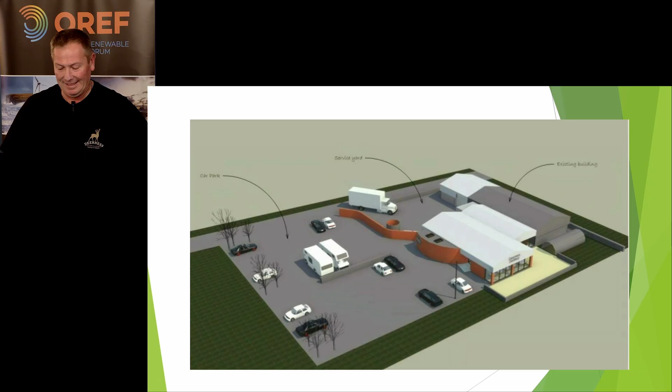In terms of our CHP plant here at Deerness Distillery, we're looking at a 40 kilowatt per hour system, which also produces hot water at the back end. But we're looking for something for base load. With wind, solar and various other things being very cyclic, it's not going to give us the base load that we need. Whereas a biogas plant, we can run with the gas train and everything else to give us base load power.

Some of the places where we need the hot water are our mashing process and our CIP cleaning. We're also looking at piping our polytunnel floors - taking up the floor, piping hot water underneath the polytunnel, heating the ground up and extending our growing season. We can do the same thing outside as well.

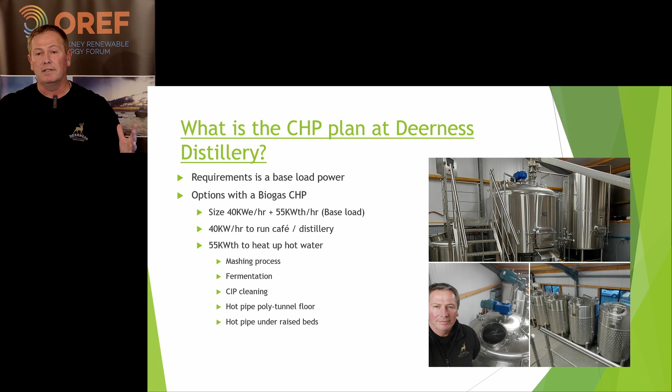You've got the ability with this - during the evening when we're no longer working in here, the biogas plant is still producing biogas, so we can have a small containment for biogas which we can then run through into our stills. Our stills next door, which you can have a look at afterwards, are gas heated, so we're currently on LPG for those.

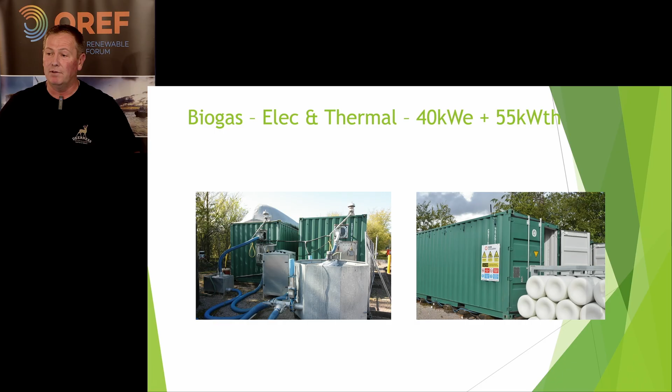We went for gas stills, direct fired. The reason we went for gas stills is that electric stills are very, very costly. We did the cost estimate for electrical stills, and it'd be in the order of about £150,000 a year to run those, versus about £35,000 in LPG gas bottles. But with a view that we could eventually substitute that with a bit of biogas in there as well, running off our own methane, which has been scrubbed prior to.

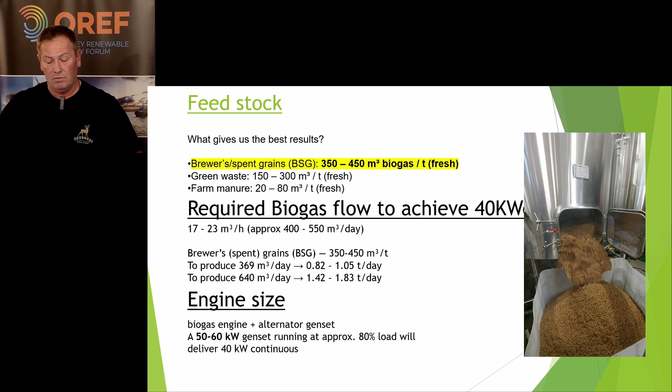In terms of what we actually need to put in there, our brewers' grains are 1.4 to 1.8 tonnes per day fed into the front end of the machine. Our loads going into our grains are probably just about a ton a day, so we've got enough yield to put into that.

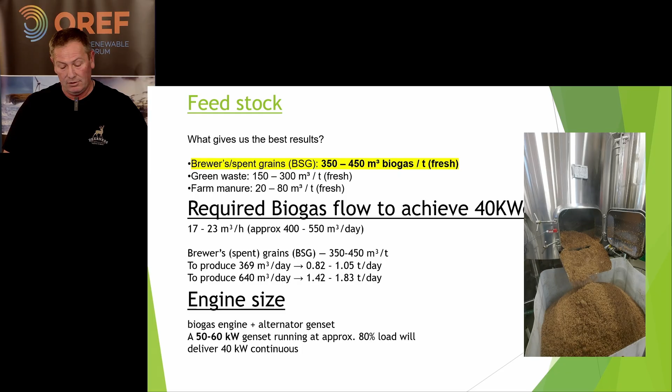In terms of engine sizing that we've been looking at, so 50 kilowatt gen sets, 80% load, which gives a 40 kilowatt continuous. It's a bit annoying, that beeping noise, isn't it? But it's there for a reason, that one.

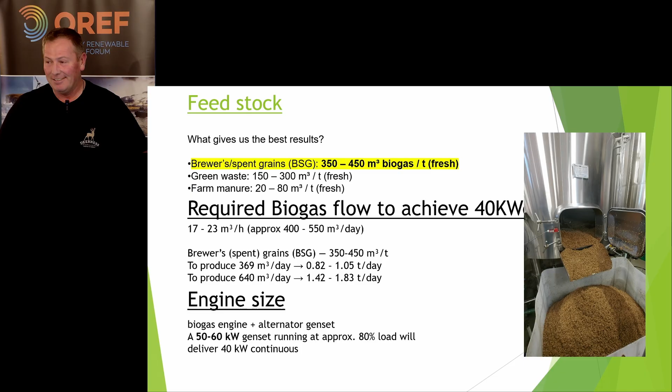James knows all about this, wouldn't you? Can you hear me all right on the speaker there, Mike? Is it okay? Is this all going okay? I'm just going to try and give you a bit of PA here. Just keep talking.

So obviously we're producing heat from our biogas plant, and we're also going to be recovering some of that from the engine jackets, so we can recover some water off there, which would be great for our process fluids.

We've got a hot liquor tank next door, a 36 kilowatt load, but if we can use some of that engine heat to put back into that tank, we're only heating up a small bit or keeping it stable rather than heating from ambient water temperature, which gets much colder in winter, 10 degrees, right up to the 75 degrees we need on our first waters. If we've got hot water coming off a jacket already at that temperature, all we're doing is maintaining it rather than putting in a massive load, so we're really trying to reduce our energy usage.

We've also got exhaust heat, we're looking at that at the moment. That brings a bit more complications - you've got gas to water exchanges, then you've also got flue gases in there as well, so you can have corrosion issues down the track.

As I said, spare methane, which we could potentially use in our copper stills. So we're mucking around with some of the feedstock at the moment to get an analysis on a sort of test bed size, doing a pilot plant, seeing how much biogas we can pull off, and what sort of crystalline structures we get out of that as well.

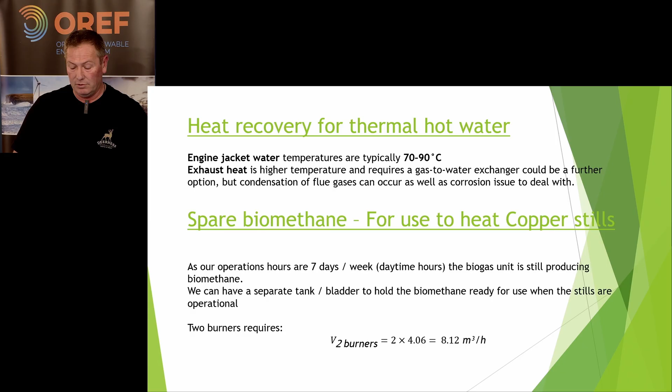Pros and cons, lots of these. Reliable off-grid electricity - if we have 40 kilowatts running at a base load, there's also a potential when we're not using that to put that back into the grid. Obviously that's a bone of contention now, as most of you probably know in the area here. There's potential to use battery backups as well.

The flexibility that gives us is, and obviously it's our waste effectively, so we can still put some of our base load to farmers. At the moment, all of our grain goes out to local farmers here for their beef cattle, but with this system it would probably be like an 80% usage of our own grain in the biogas, 20% would still go off to the farmer.

We've also got the ability, if we need more feedstock, to touch base with other distilleries who've got extra feed, extra grain that we can take away as well.

Energy security - moving forward, this gives us a nice reduction in our dependence on fossil fuels and grid outages. We've still obviously got the main grid here, but we'll try and be sustainable on our own waste.

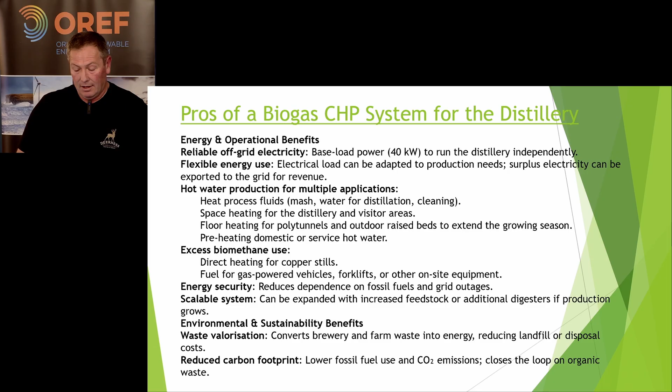It provides a bit of sustainable agricultural integration. So we've got hot water, rich nutrient digestate, which supports our own botanicals and food. The digestion plant also produces about 1.2 tonnes per day of rich fertiliser out the back end, which can then be put back onto the land, back through to the farmers. It comes out quite almost like a black treacle when it comes out the back end, but it can be mixed into permastores and various other things to put back onto the land. So there's about 1.2 tonne feed at the front end, and then you've got a continuous feed coming out the back end.

In terms of the financial side of things, cost savings - obviously we reduce our electricity immensely on site. We've got the ability to export that back in, provided everything else falls into place in Orkney in terms of exports further down the track.

For us, it also demonstrates sustainability and innovation. I know there's a big push with governments all over the world for businesses to try and offset and look at different ways of producing energy, so it gives us a very nice USP here.

The plan for the future would be to have local grains grown on site and at various farms. We're also putting a small malt house on site, a 2-tonne batch malting plant, so we can malt local grains grown in Orkney, whether it be beer barley or small batches of barley. Because our load is small, we can take a 10-tonne batch of barley off a farm that's at malting grade into our new malt house, a 2-tonne batch malter, so we can steep, germinate, kiln it. The kiln also has an exterior smoker box, so we can smoke it too, and we're trying to incorporate all of that with the biogas plant, so everything is off-grid.

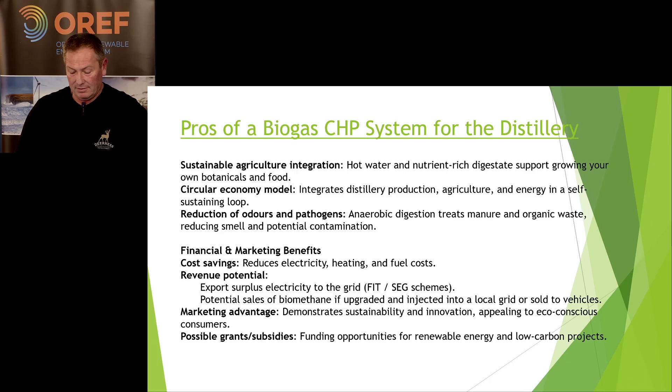Grants and subsidies - unfortunately I missed a great grant that came up when we were building this, so we're hanging around to see what pops up. There's obviously a bit of turmoil in the government at the moment, so we'll see what comes out in terms of funding to help us get going with this.

Obviously there are operational process advantages - continuous supply of heat and power, reduces our energy volatility, integrates our heat and power management, and we've got nutrient recovery.

As I said, the fertilizer we can then put back into our polytunnels, into the kitchen garden we're putting in next door, and also back out to farmers. It could probably be a nice little test site for colleges and universities to come and see what we're doing here once we get this going, and it gives us resilience as well.

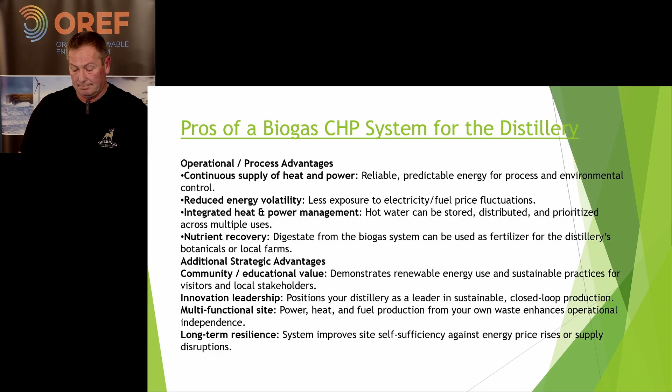Lots of technical and operational challenges - I've operated these before but at a much bigger scale, and I've had many a time lying in the leachate trying to unblock pipes and things like that. So again, it's not a new technology, but at a smaller scale there are some complexities to it.

There's also the challenge of controlling the gas quality, in terms of calorific value. But with the biogas, using brewer's grains, we've got quite a stable feedstock, so there's not a huge fluctuation in that feed. There are a couple of other breweries and distilleries across Scotland and the UK doing this, and obviously you need someone feeding that through the day, and someone maintaining it as well.

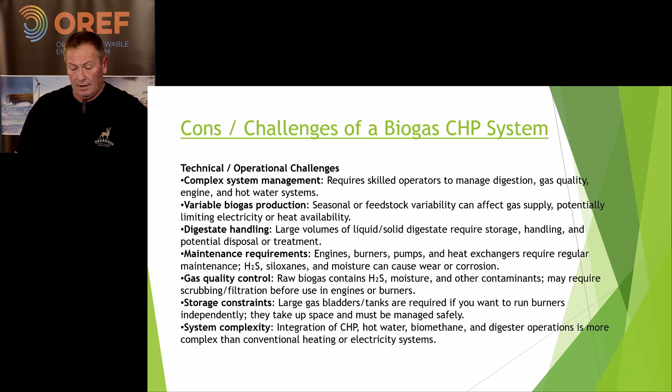So obviously the cons - there's the financial side of things. Some of our initial costs, you're looking at about £150,000 just for some of the kit at a 40 kilowatt level, which sounds like a lot of money up front. Then you've got to pipe the whole thing, put the infrastructure in, go through planning, building control, everything else that goes with it.

I've had initial discussions with SEPA about waste management licenses, and at this sort of scale you're actually starting to fall below some of the higher regulatory requirements in terms of emissions. We actually fall completely underneath the waste management side of things because we're using our own waste, and it's slightly underneath that threshold.

Then there's the capital cost side of things, the payback period. If you think about a wind turbine - what's a 5 kilowatt wind turbine nowadays? 30,000 to 40,000 pounds. So if you add those up to get to 40 kilowatts, you're probably in the same ballpark, not too far away. And you get quite a lot out the back end in terms of hot water and things like that as well, so you get a lot of differences from that.

Obviously it's feedstock dependent - if we stop producing, or there's a breakdown in the plant, then we haven't got the feedstock to go in there. That's something we're looking at with some of our local farmers. There's quite a few farmers who've got old grain from last year sat in the back corner of the shed that's sprouted, so there are other feedstocks we can utilise. There's also probably a discussion with some of the other distilleries and breweries on the island here, that we could take some stuff from them as well.

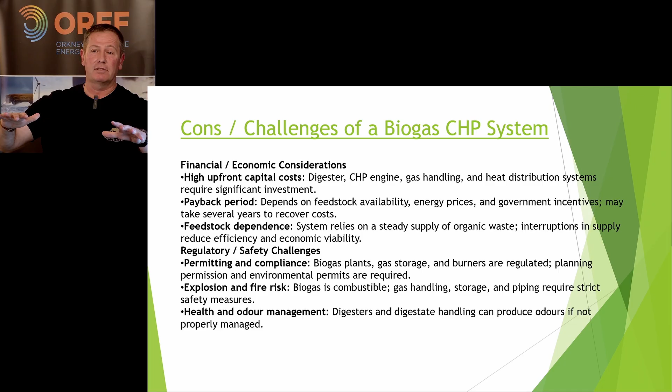As I said, explosions. Health and odour management is another one. With some of the projects we did previously, we had our exhaust emissions going through a bed of coconut husks as abatement for emissions and odour. But at this sort of size, you've actually got quite small emissions.

Obviously, noise is another one. You've got an engine or a gas turbine running in the background, but again, there's ways to mitigate the noise production there. Obviously, we're quite remote where we are here, although on a high windy day you can hear lots of things happening in the parish.

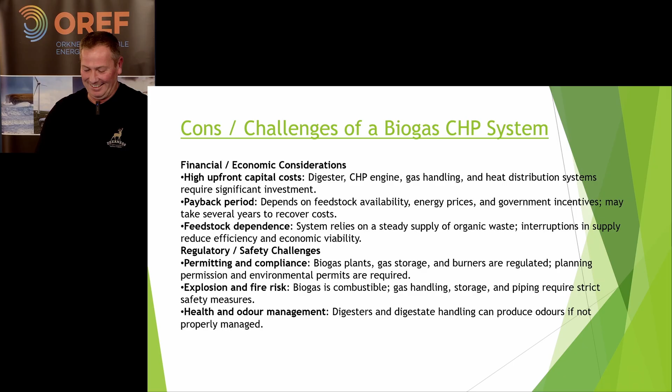So operational limitations - obviously you've got lots of equipment, scalability and infrastructure. Being on an island obviously limits a lot of that, so you've got various bits of kit that are bespoke to the equipment, so having good spares, having a supply chain for that.

We're also dependent on continuous operation, so the CHP units need to be running continuously, and if we go down, obviously it reduces efficiency in terms of the gas rebuilding again. So we're just working out our whole mass balance at the moment in terms of an operational CHP plant.

Having a separate gas storage system for the stills, which are on Monday to Friday - with this on, we're able to go Saturdays and Sundays as well. Space requirements, not an issue for where we are here. We've got quite a bit of land here. We're probably tucking it in the back out of the way so no one can see it.

So digestate management impacts - obviously you've got potential for pollution risks in terms of leaks. So we'd have to look at bunding the site, look at all of our drainage and everything else. Obviously high rainfall with the potential for things to flood and leak out.

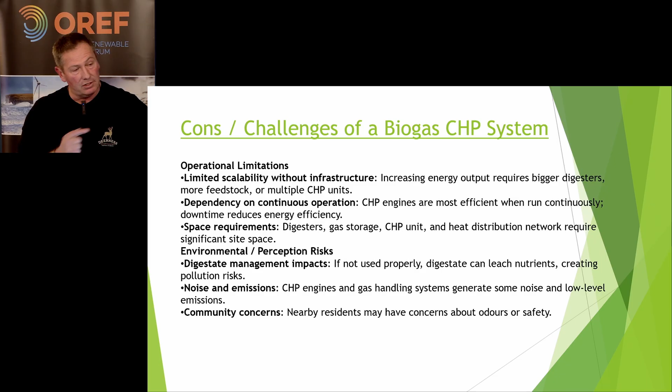As you saw at the start, these are in shipping containers, so in terms of mobilising to site, all the engine and turbines, everything is all in one. The CHP unit has got a PLC system, so it's all integrated so you can drop things on site quite quickly, start loading up the front end, and then start operating.

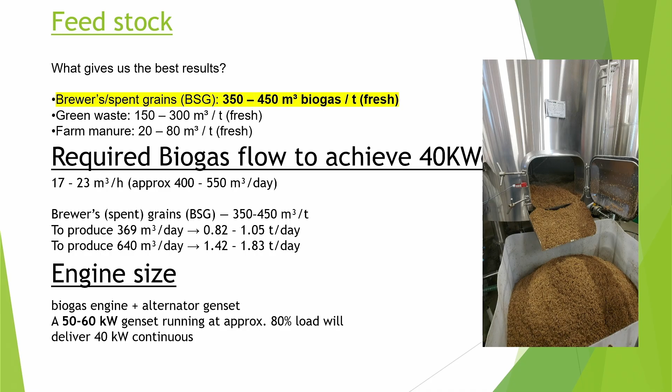This is the problem we had on these big plants - 175,000 tonnes of stuff coming in, not all green waste, but we had some interesting things coming through. We had a shark through one day. This is Australia, obviously - lots of money, lots of things like that. There were drug drops and things.

But we had very much seasonal waste. During the summertime, very high sugar content with all the green grass and cuttings off the trees and everything else, which impacted the percolation system and digestion system because you got quite high concentrates of sugars going through. They start to crystallise in the pipes, so you had pipes getting blocked with crystallisation.

So as soon as you start introducing very sugary, very green things, that can cause different problems. The plant we did was a £175 million project, but every 2 months it had different outputs, because you had different waste going through. There was a purge on certain things like videotape, and then for the next 2 weeks the whole place was just bunged up with videotape. It's quite interesting - the whole feedstock and analysis of what goes in the front end impacts what comes out the back end, like anything else.